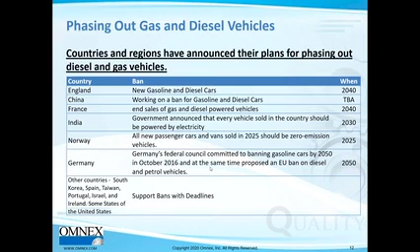Folks, let's continue here. I was mentioning to you that it's really countries that are moving the markets. And of course, based on what the countries are announcing in terms of bans, you'll see that the whole automotive market has announced that the next set of vehicles are coming out all electric. And soon to follow after electric, it is autonomous cars.

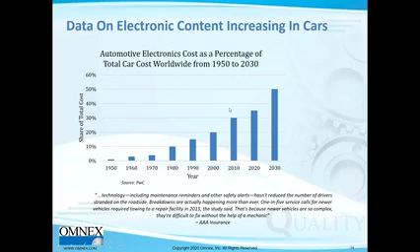It is right around 35% hardware and software, and that's going to become 50%. And of course, it's now software, not just hardware. Mechatronic is the word they use for the mechanical and hardware designs that we have. And to go back in history, when the standard first came out in 2011, it was really because of the Toyota braking incident that they called a mechatronic issue. And 26262, or functional safety, was really expedited as a standard because of that.

So what do our OEMs tell us today? They tell us that the big warranty issues they're having are all software.

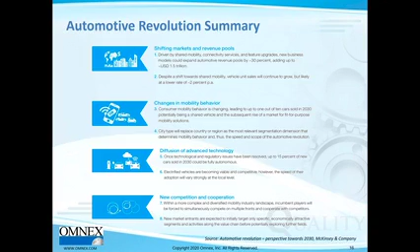If I didn't make that point, software is a key issue, and that's why you're starting to see OEMs like Ford put together groups to work on ASPICE. The last thing I mentioned then is that shift in sales to $1.5 trillion and 30% growth in the pool.

All right, so these are the questions we have to ask. If there's this change here, I haven't yet talked about what the product means, so maybe I'm a little early asking this question, but this is the question we'll ask when we're done with the EV/AV section. This change in the product mix, what does that mean to new product development? What does it mean to the management system we have today? Okay, we'll try to now answer it by what Omnex calls its 7 levers.

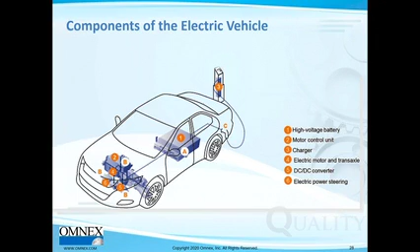All right. Let's understand, as we go forward, the impact on design. These are the components of an electric vehicle. And you can see fundamentally the electric vehicle has fewer components than an internal combustion engine, and is fairly simple. But of course, it has an incredible amount of new technology, increased hardware and software, and part of that is that they did not need to be connected. But of course, today's vehicles are infinitely connected with the outside world. I'll talk about that in a second.

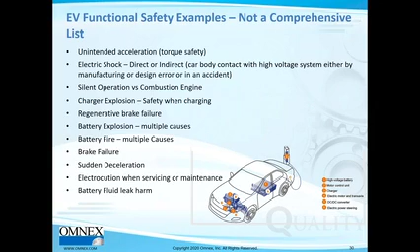Many safety concerns in EV. Why, you might say? Well, really, it's the battery pack. Each of those battery packs has enough power in them to take out a city block. Cybersecurity concerns, supply chain concerns. And of course, here are all the different issues. It's not the full list of the battery pack and the electric vehicle. Oh, I thought I had cybersecurity here, but there are a number of different issues with cybersecurity. I'll talk more about that when I get to the autonomous vehicle section, which is now.

So let's understand the AV basics. The big part of AV, autonomous vehicles, the self-driving vehicle, is a perception system. Whether you go level 3, level 4, or level 5 SAE, it's the perception system. And folks, in this webinar, I'm not going to spend a lot of time on SAE level 1 through level 5. I have spoken quite a bit about that in previous webinars. Please go and listen to one of the similar sounding names, but it'll be a different webinar. But really, for the autonomous car, this is key.

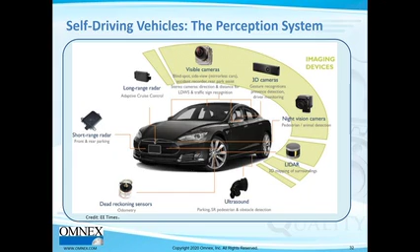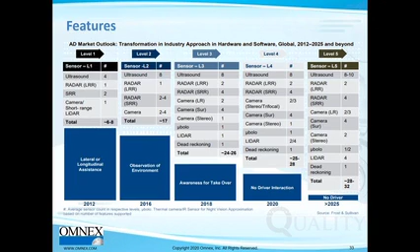A couple of things you notice from here is the amount of hardware, and along with that, of course, is software. As soon as you say perception systems, you have software to deal with. And let me just tell you, identifying the perception is so key. You have AI to go with it. I put this slide together so that you understand the amount of hardware between SAE level 1 through level 5. A level 5 vehicle, they think, will have 28 to 32 sensors, whereas a level 4 will have 25 to 28 sensors. So a tremendous amount of hardware. And folks, with this hardware, you can almost imagine there's a tremendous amount of software.

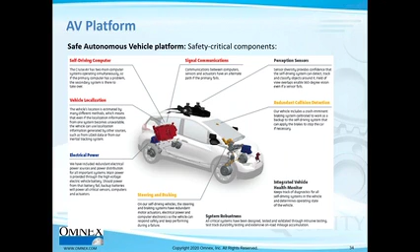So here is the AV platform, and here are some of the safety critical components. You can see perception is a key area, redundant collision detection, and of course, immediately you have to be concerned about vehicle-to-vehicle communication. Signal communications inside the vehicle, and having an alternative path if the primary fails. And the idea is, if something happens, the AI system has to kick in, and you don't want to go to the driver unless it's a last resort. And then the self-driving computer, vehicle localization, electric power, steering and braking, system robustness, and health monitoring are all safety critical components.

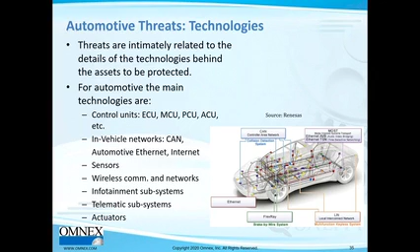All right, what about automotive threats and technologies? Here are all the main technologies, and every one of them is a cybersecurity threat, from the ECU, the control units. I forget now exactly how many we have, somewhere between 30 and 45 ECUs. I hope it's not 100 and I'm off on it. I was just in a cybersecurity certification class, and I forget the number that was mentioned by our SME. Then, of course, inside the vehicle, we have CAN, we have Ethernet and Internet, we have sensors, wireless communication, infotainment system, telematic subsystems, and actuators. All of them, folks, are areas hackers can hack into.

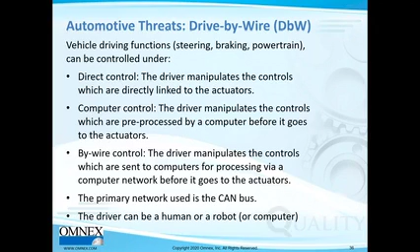So vehicle driving functions can be controlled. So just to tell you that anytime you have drive-by-wire or any kind of computer control or the CAN bus, all areas which are threats that we have to, through threat and risk analysis, TARA, factor out and ensure our design. Here's an example of a radar subsystem where somebody could mimic signals and take over. And if they mimic radar signals, folks, we are in trouble, okay?

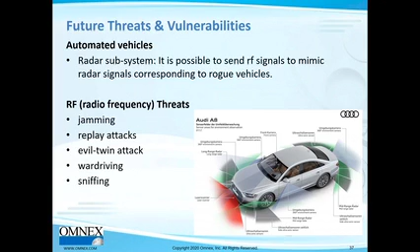Because they could either make us have an accident or they could drive us somewhere else. Okay. Maybe not by radar, but it has consequences. All right. What does this mean to the automotive industry and the standards in the automotive industry? So you can see these 7 different bullets, which I'll talk to in a second, all impacting IATF 16949.

There's new product development that I'll be talking about, and the changes in the new product development all impact your IATF 16949. So folks, those of you in the new EV AV market or in that division need to fundamentally redo your business management system, which is governed by IATF 16949. Of course, you still need to meet IATF 16949, but fundamentally, the system has to have some additional requirements.

Then we have functional safety. As you saw, one of the fundamental areas in electric vehicles and autonomous vehicles is automotive safety. Let me jump here to cybersecurity. Cybersecurity is a key area of concern, and Omnex is forecasting this is the year where we're going to see cyber attacks where people take over cars.

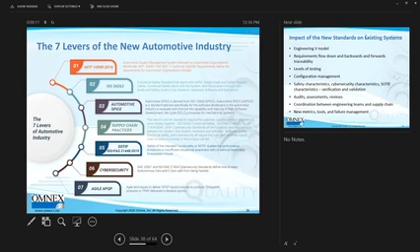Folks, just hang on. I'm getting a little help here. Let's try this. I'm told this might fix the movement problem. Somewhere we have a timer on, and we're not quite sure where it is. It's some sort of a universal setting. All right. So where was I?

I was still in this slide here, and I was telling you some of the practices that we have, which I'll share with you in the next slide. Requirements, testing, the development interface agreement from both cybersecurity and functional safety, and the joint agreement from SPICE all mean that the supplier and the customer need to work in lockstep, and then the supplier and the sub-supplier need to work in lockstep. All of these have a big impact on the supply chain practices.

And then let me just say this, I never get to talk about Agile APQP. All of you that are doing hardware design and software design today need to look at Agile at scale. And of course, for us in automotive, it is Agile APQP. This is the only slide I spend on in terms of the new standards, but the new standards bring in big impacts on the existing systems. Folks, imagine that this is the slide of the impact on IATF 16949. So we have the V model.

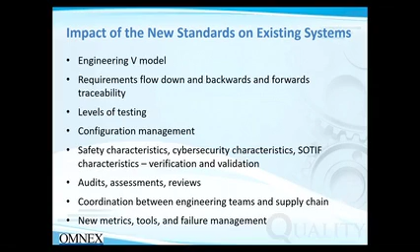So what does a V model mean? I'll get to talk to you about that again in one second when I talk about the impact of this, the systems engineering. Requirements flow down, all the way down, and then traceability up and down. And I just wanted to say, requirements go down, testing comes up, okay? The levels of testing: you need to show how you're doing unit testing in software, integration testing, then the same thing with hardware, then hardware and software testing, and then hardware and software and the system integration testing, and then qualification testing of the system.

All right, what does this all mean? All this means that there's a big impact for competencies in engineering, okay? And let's start first with this change and understand that today we're talking about a safety cycle, engineering cycle and a cybersecurity cycle, and we have to put in a concept phase in our new product development. So of course, you can still follow APQP, the new product development process the automotive industry follows, but you also have what is called a concept phase where fundamental things get defined, and it's key for the concept phase as the initiation of design.

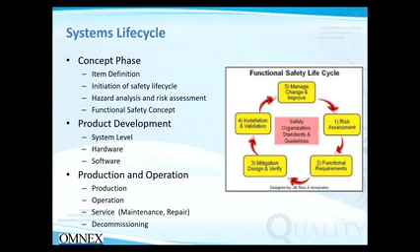This is where we'll define what is called the cybersecurity assurance levels, CALs, and this is also where we come up with the automotive safety integrity levels, ASILs. Then what we see is in product development, the design is broken down into system, hardware, and software. Because we've been doing a lot of work in this area for the last couple of years, and much more in the last 2 years, I can tell you our OEMs and our tier ones are scrambling because this is not the way they're organized today. And of course, these standards have an impact on manufacturing as well.

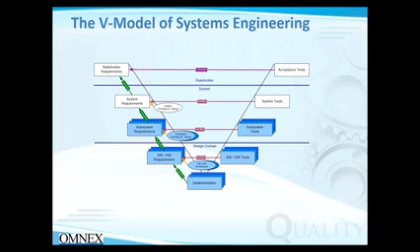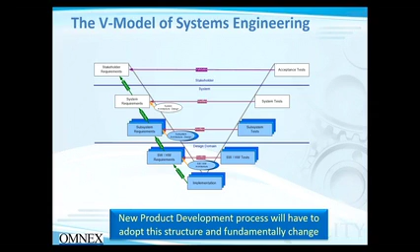So let's talk a little bit about this V model. This is the V model of systems engineering. And folks, what we see here is that if this subsystem has hardware and software, and the subsystem has other systems of its own, hardware and software, you can see there's an entire supply chain that we need to flow out to, back to, and then flow back into. So this new product development process will have to adopt this structure, and it will have to fundamentally change, okay? So we're talking about fundamental change to the new product development process.

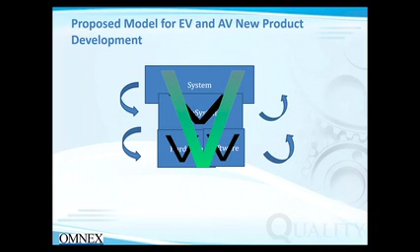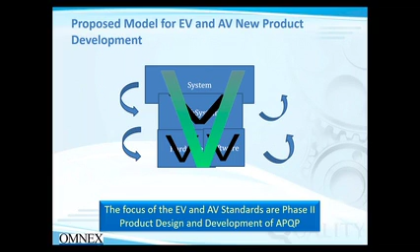So look at this. There is a V from the system all the way to the hardware and software. And folks, I like to tell people that the automotive industry is not like this. Even very simple companies we work with, simple BOMs, have 50 to 60 suppliers, which means there's a tremendous amount of information that needs to flow down just to the tier 2 of a tier 1. And just to tell you, in this V there are 3 small V's: the subsystem, the hardware and the software. I'm only saying that this is fundamentally different from the way APQP works. And as far as I know, all of this is done in phase 2 of APQP. So a major rewrite of the new product development process is needed, where we put in systems engineering.

All right. So hardware and software and AI, because these perception systems need AI. Plus, in automotive design, we need to start putting in AI capabilities. Functional safety and SOTIF, cybersecurity competencies, the connectivity car to car, and there's a different language in terms of connecting between the infrastructure and the car, okay? And then, of course, configuration management. And it's not as simple as it seems. These are fundamental new competencies that we in the automotive industry don't have.

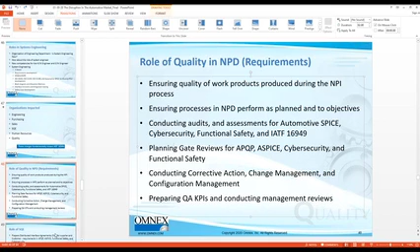Then the last bullet here, preparing the quality assurance KPI and conducting management reviews at a project level around the QA functions is another requirement coming from these standards.